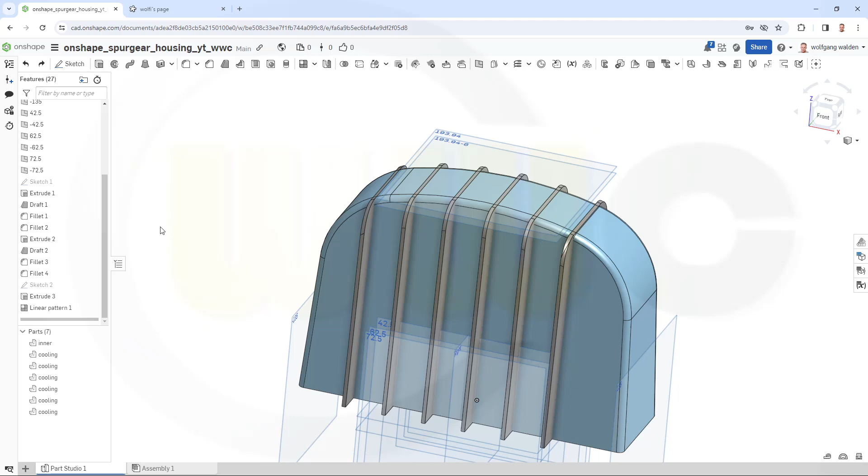Hi, welcome to the second part of the spur gear housing in Onshape. Let's hide those solids here.

I need another plane, yes, and still another plane, with a distance from the top plane of 85 millimeters. Confirm, move that plane up here, and rename it to 85.

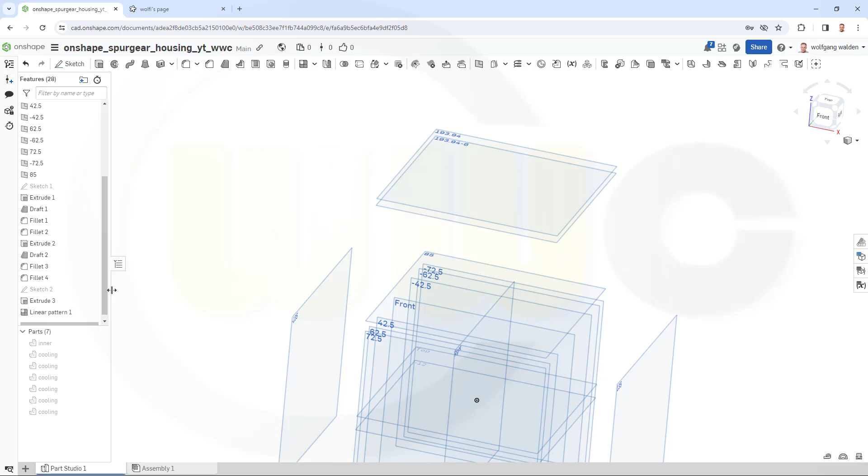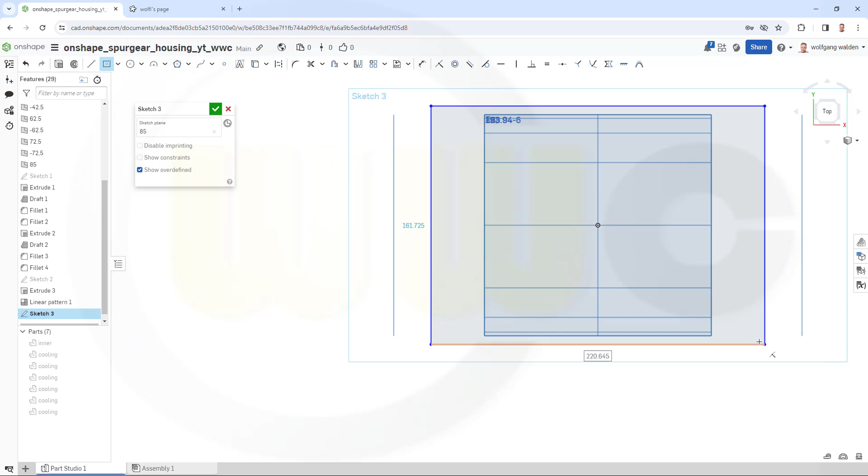Then I need a sketch on that plane, on the top plane, and on the plane which is 12 millimeters below. Let's start with a sketch on that 85 plane. Sketch, view from above, and I need a centered rectangle like this, with dimensions 300 by 110.

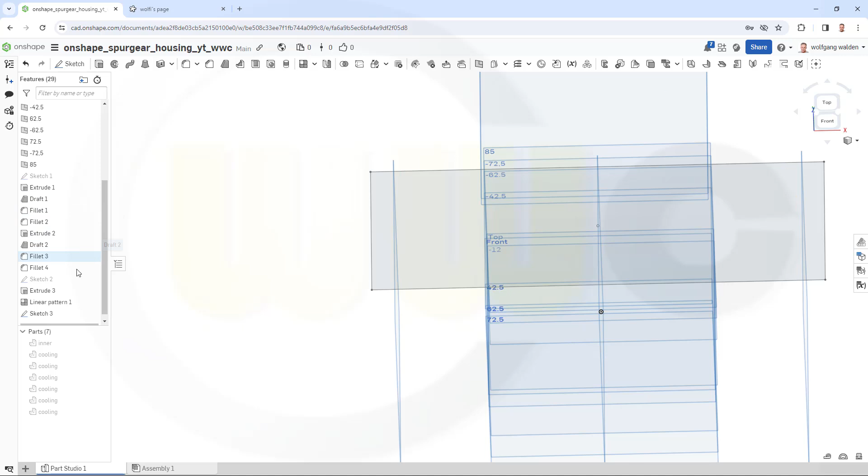Leave that sketch. Next would be on the top plane. I could copy it, but it's easier to do it with a new sketch. So go for the top plane, sketch, view from above, go again for a centered one, and these dimensions are 270 by 145.

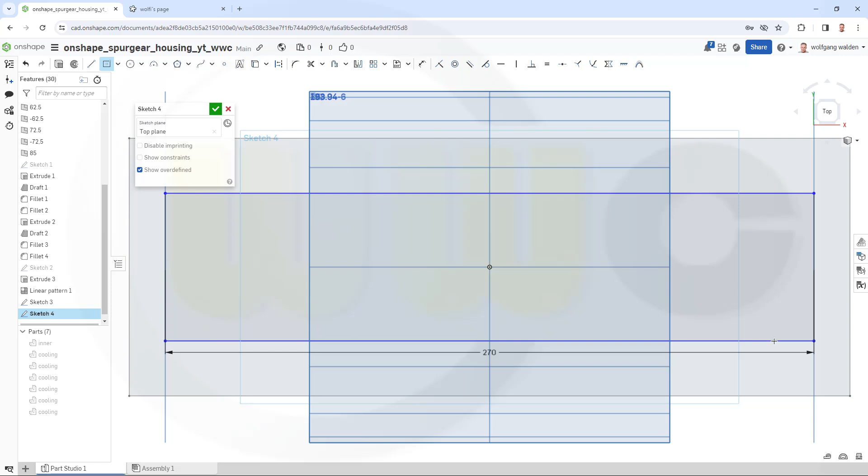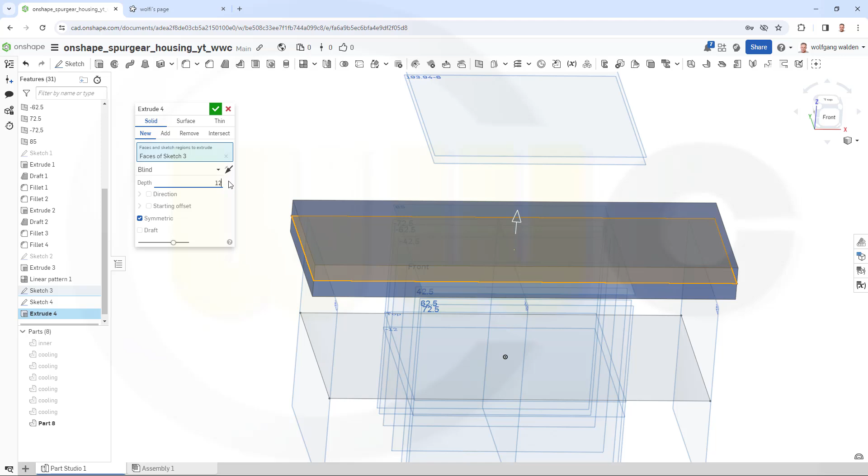Now I can make an extrude with this sketch, or do it first with this one - it doesn't really matter. Make with this one a mirrored, symmetric extrude, not blind. Where's my symmetry? There you go. It should be altogether 12 millimeters. Confirm, and it's a new body, of course.

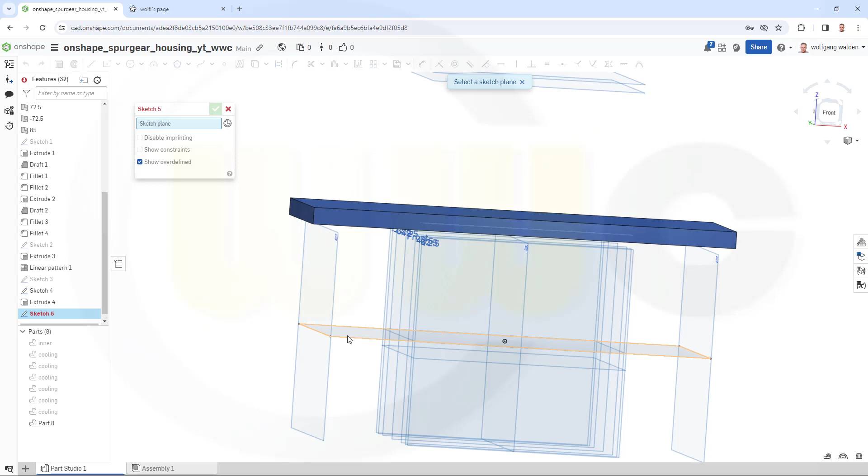Now for the second sketch, another extrude, and this should go up to the -12 plane. So select that sketch, go up to a face, and the face would be the -12 plane, this one here. Confirm. Then I need another sketch, now on the -12 plane.

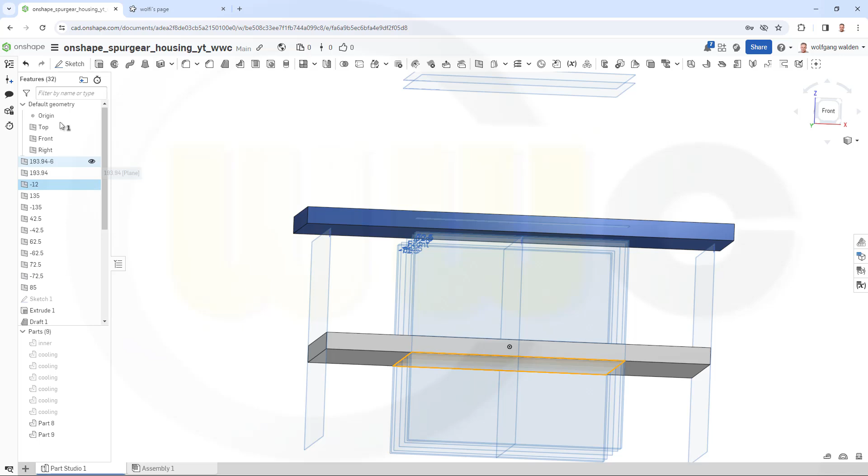On this plane, another sketch, again a centered rectangle. Let's view from the top and go for a centered one. You could hide those solids. This should be 200 by 145. Confirm.

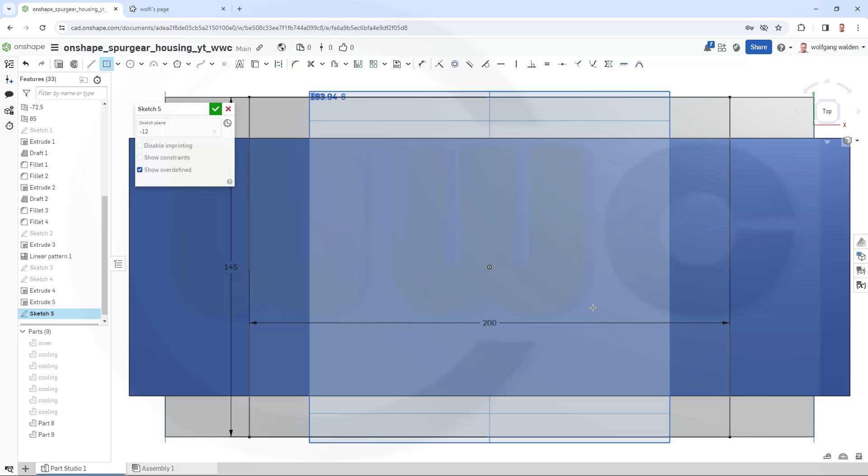That sketch should be right there. Yes, this sketch. Now I want to make an extrude, and I want it to be 7 millimeters. I want to remove it from that solid, not the other way around. So in this direction, that's okay.

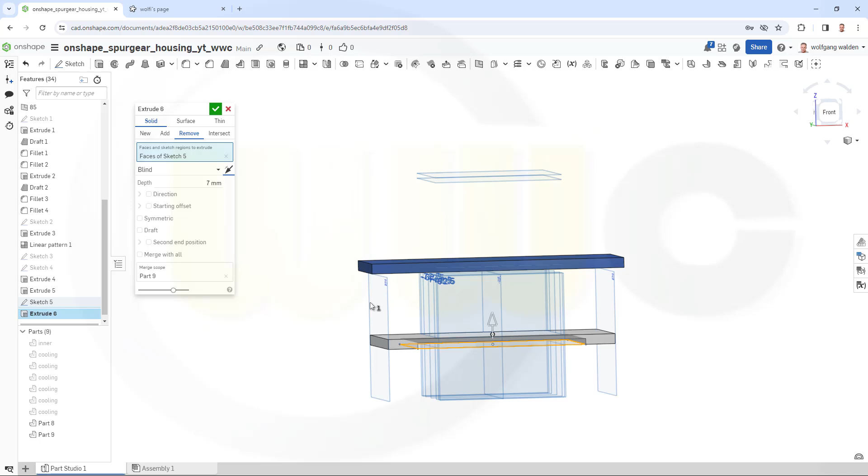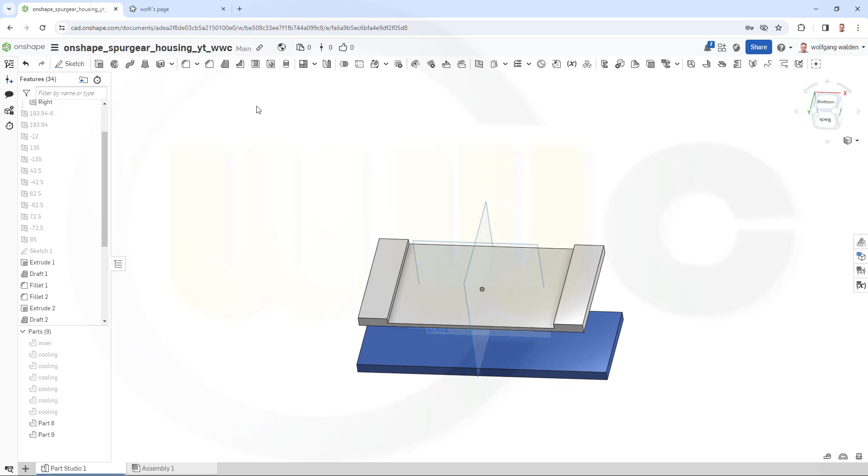I could hide those planes for the moment, so it's better visible. Hide. Okay. Now I want to add a draft, a 45-degree draft, on this face here, on that one, and on the other side here as well. So let's go for a draft.

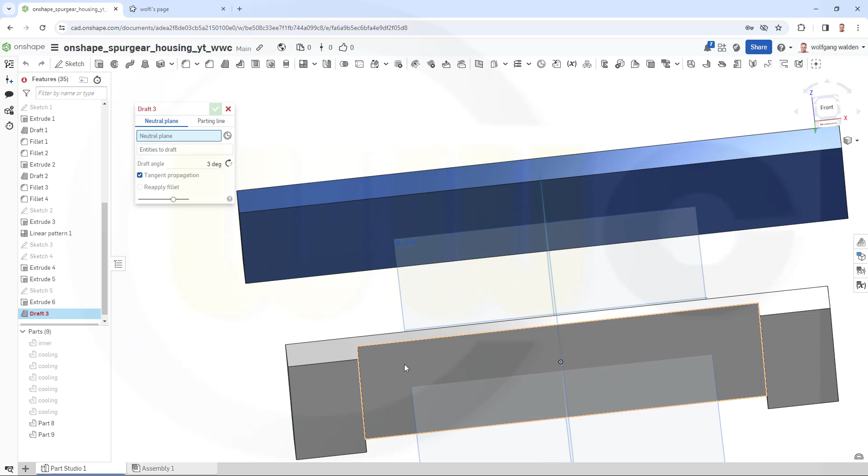That would be this one here. The neutral plane would be that face here. I want to draft 45 degrees on this face here. Looks good. And that one here - draft direction is okay, so let's confirm.

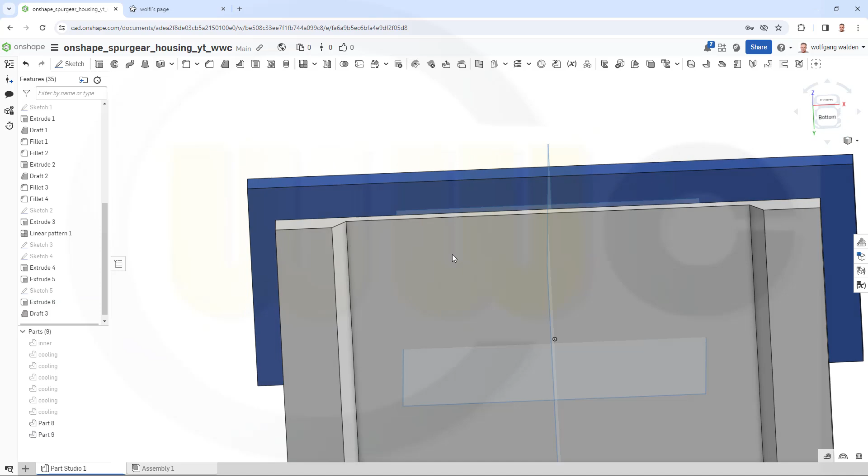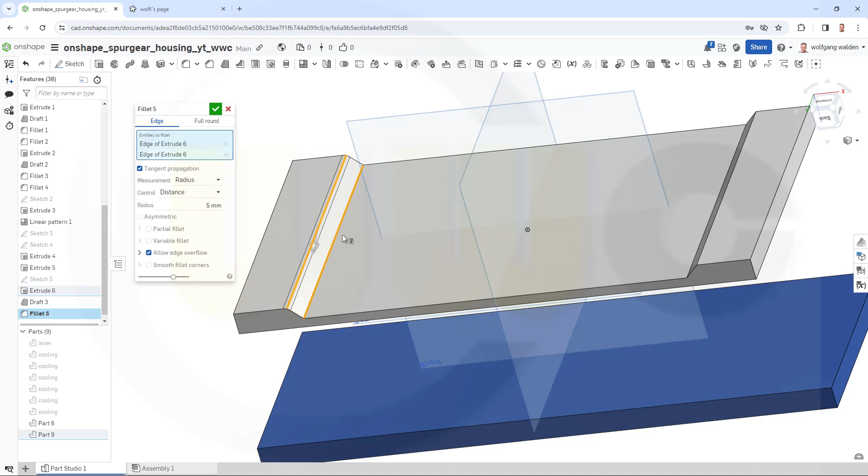Now let's add two fillets here, 5mm here and here. Let's go for the fillet, 5mm, on this edge here, that edge, this one and that one, and confirm.

Now I want to do a rib. There is a rib tool, and usually it has two options: parallel or normal to sketch plane. I want to go for parallel, which means I need a sketch on this plane here.

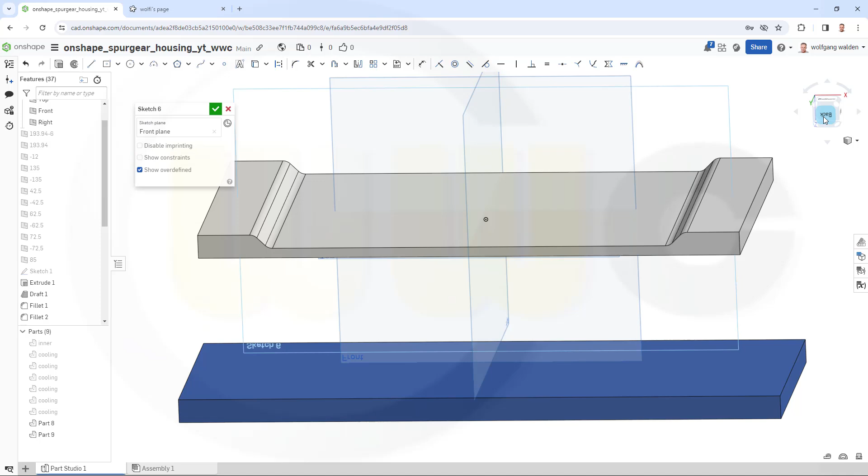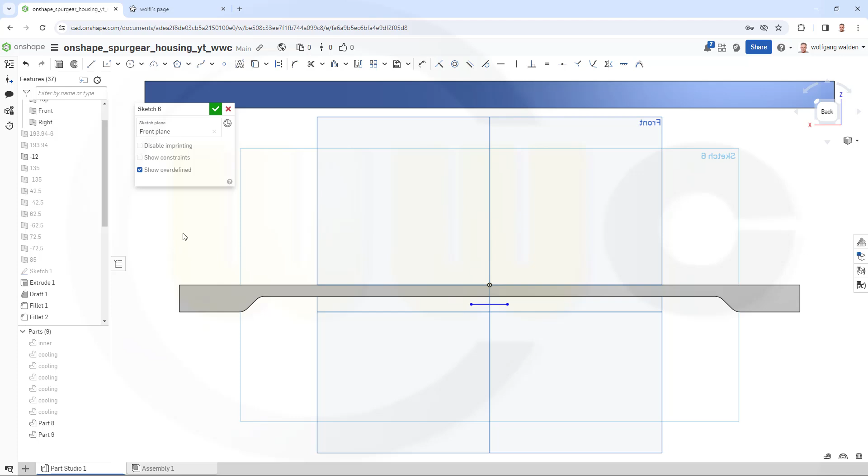So go for a sketch, select that plane, and I need just a small line. The distance from that line to the 12mm plane here, let's show it, should be 1mm. Let's move it a little bit above and add a dimension like that - this should be 1mm.

The length of this one should be symmetric, so I could go for symmetry, or add a midpoint. I'm not sure, so let's add just a dimension here - let's make it 20mm, and this should be symmetric. Where's the symmetry? That's the symmetry, right? Let's use this point on that point and make it symmetric to that plane.

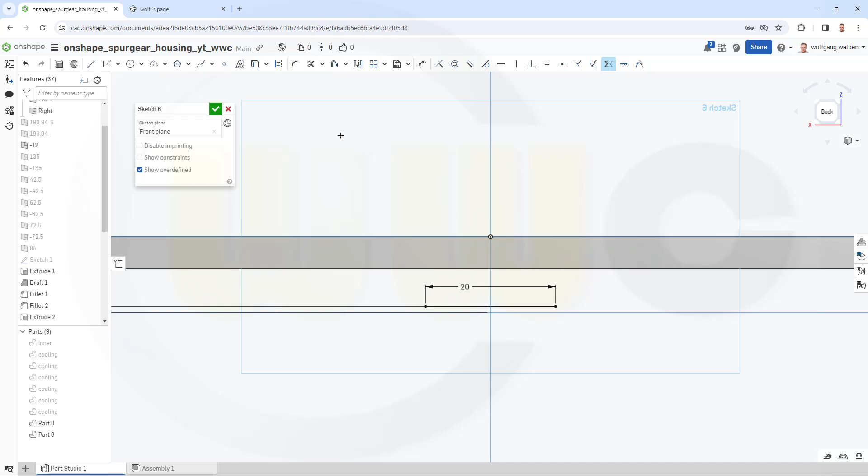Finish that sketch, and now I should be able to do a rib all across. Go for the rib tool - this should be parallel to sketch plane, yes. Thickness should be 4mm, and it should be, of course, symmetric.

Let's see if we can do that symmetric thickness. Let's select it, and go to the opposite direction. Extend profiles to part. No draft.

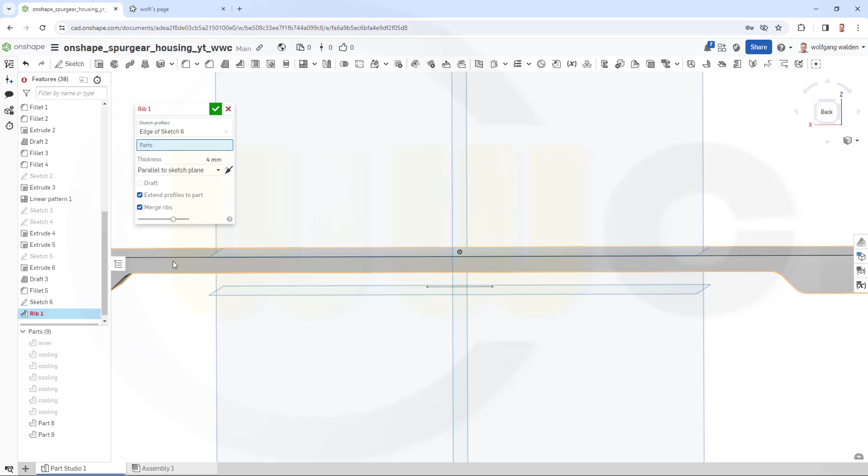So what else? That's the part. Yes, and do the other way around. That's okay, and it's symmetric. That's good. Confirm.

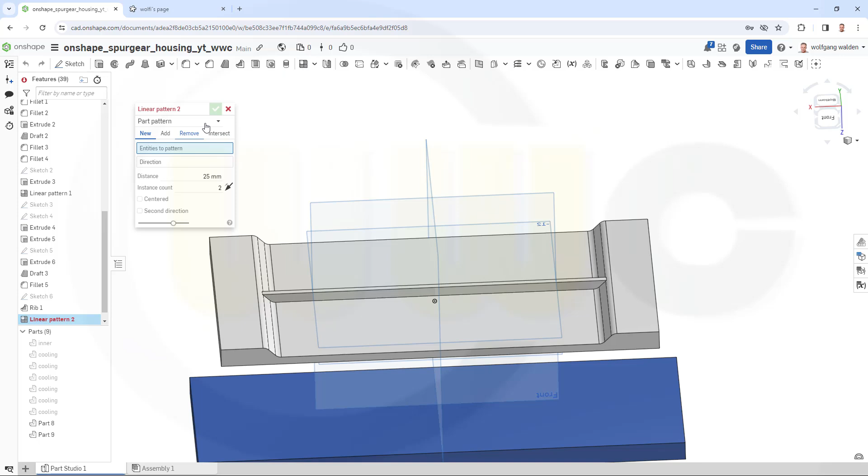Now I want to pattern that feature, and I want to go for a linear pattern. The feature would be, of course, that rib here. The direction would be sort of that edge, or normal to a plane. Let's see if we can do it with normal to a plane - the direction should be normal to that plane if possible.

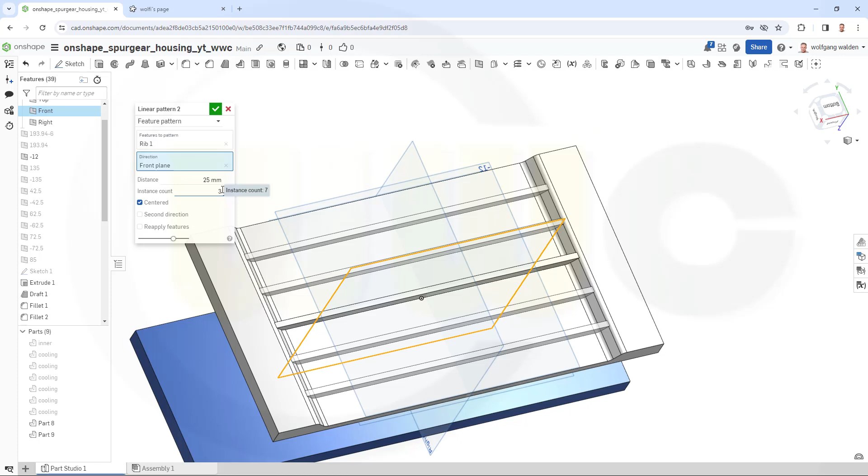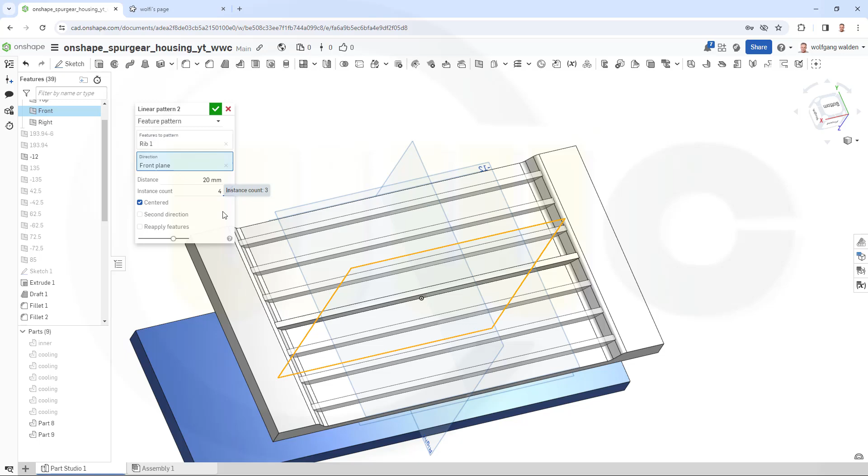Yes, okay. I will need 7 instances altogether, and it should be centered. So if we go for 7 and make it centered, it's 7 to both sides. So I need 3 to both sides, or even 4. I need a distance of 20mm. Okay, so that's 3, and if we go for 4, we should have 7 instances, and confirm.

Great. Let's bring back our parts, and that's it for today.